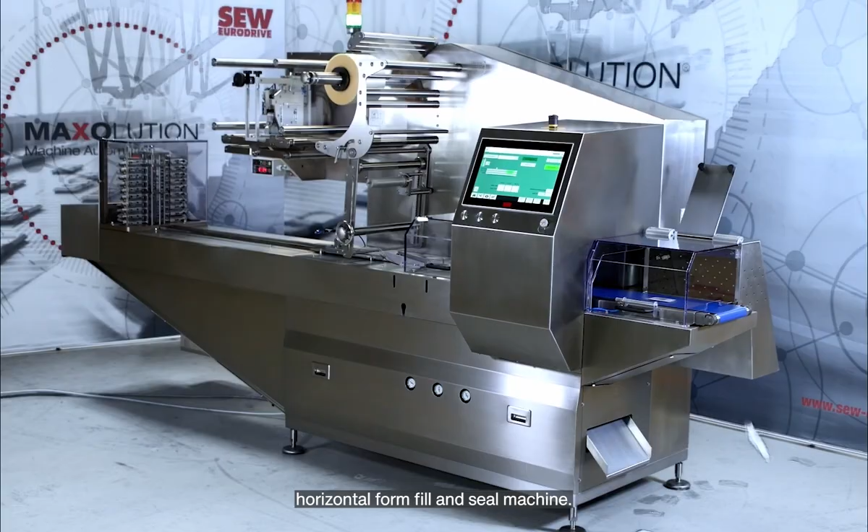This is how it works. In this three-part series, I'll be showing you how we at SEW automate a 5-axis horizontal form fill and seal machine. In this first part, we'll be preparing the machine's axis here in the office. I'll be showing you how you can use our solution package to parameterize the components and how easy it is to jog the first axis in manual mode.

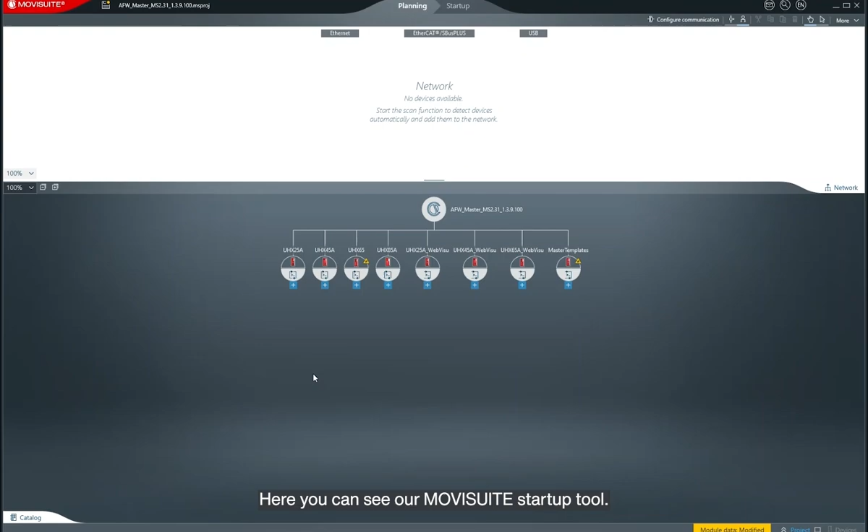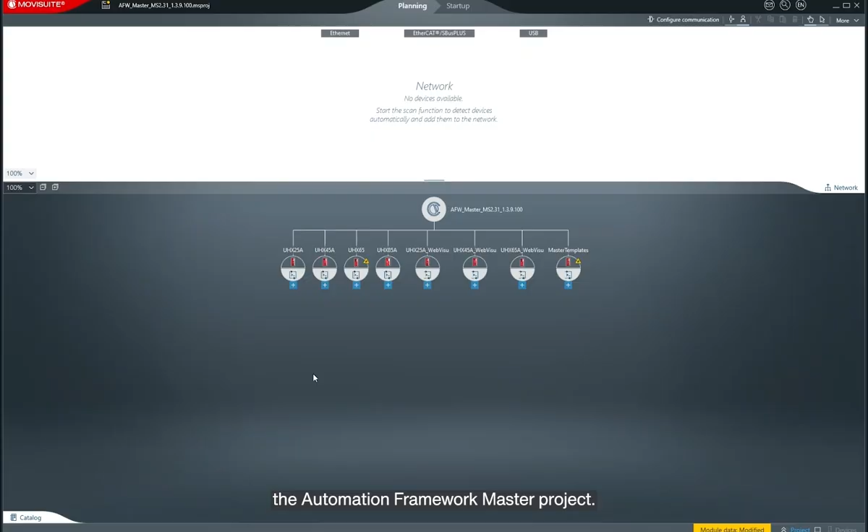Here you can see our MOVISUITE startup tool. We've activated planning mode, making it easy for us to carry out the initial steps in the office. We've already opened the automation framework master project. You can see the starter projects for our controllers and our master templates for the machine modules. We're using a MOVI-C controller UHX65 for the form fill seal machine, so we start by deleting all other controllers.

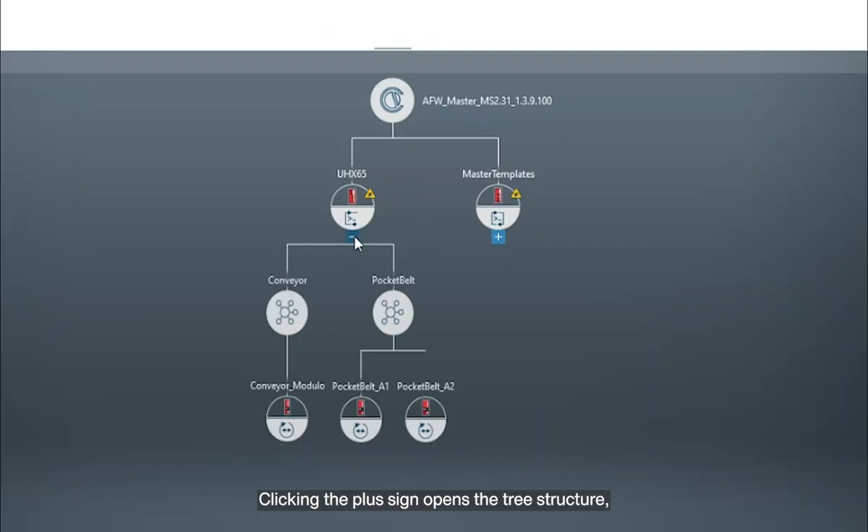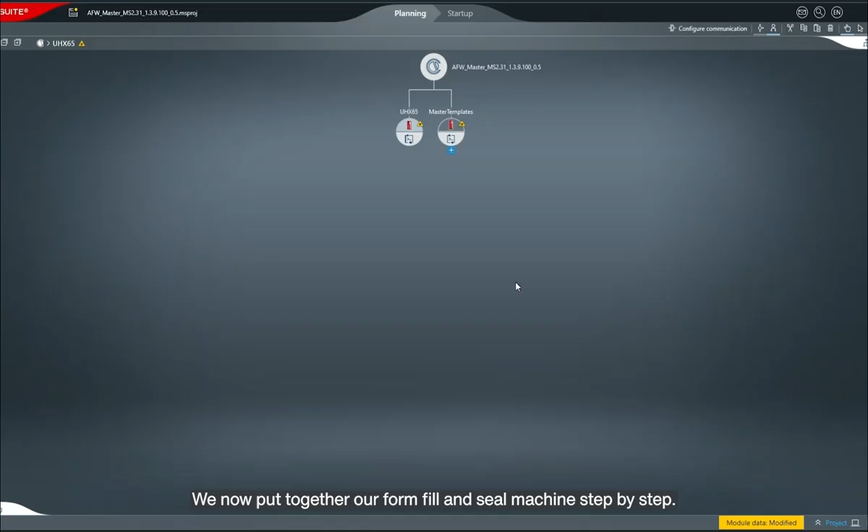Clicking the plus sign opens the tree structure, and we can see that the controller already contains a sample project with a simple conveyor and pocket belt. We don't need these machine modules for our form fill and seal machine, so we delete them before going any further. We now put together our form fill and seal machine step by step. First of all, we take a virtual axis from the machine module template library. This axis is the timing master for all the other synchronized axes.

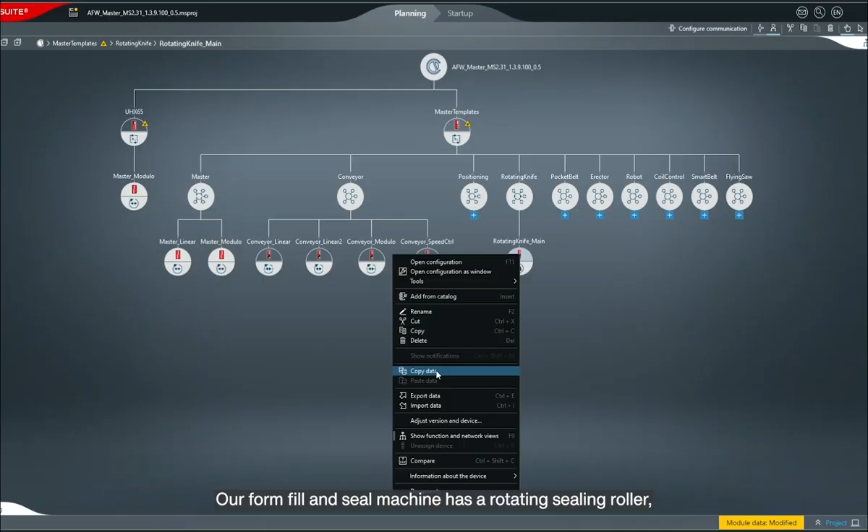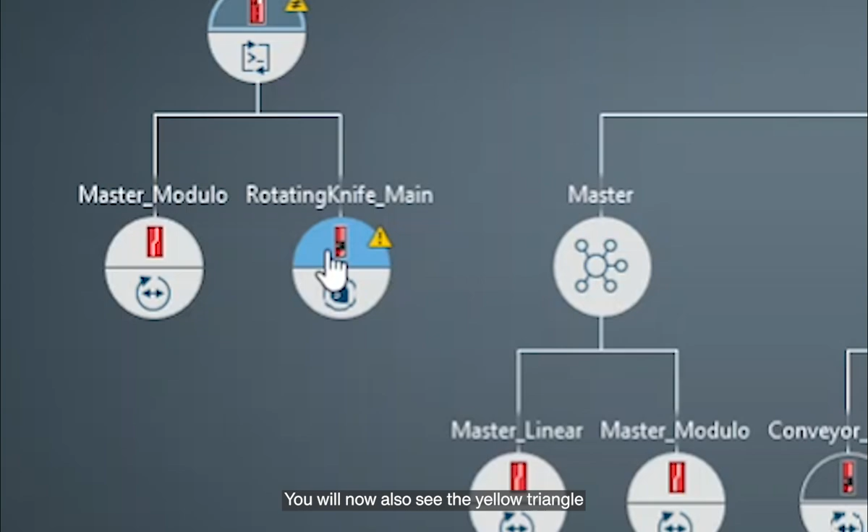Our form fill and seal machine has a rotating sealing roller, and we can simply copy and paste the suitable axis module, including the camming. You can see MOVI-Kit camming in the bottom half. You will now also see the yellow triangle. MOVISUITE is telling us we need to re-parameterize the master axis. We now have to assign the master correctly. To do this, we click our rotating knife controller functions and select camming. On the camming tab, we select master modulo.

We now copy the axis 3 times and assign the appropriate names. Longitudinal seal for longitudinal sealing, cross seal for the sealing roller, output conveyor for the output conveyor, and the pocket chain for the timing chain with the product pockets. This is what you should end up with.

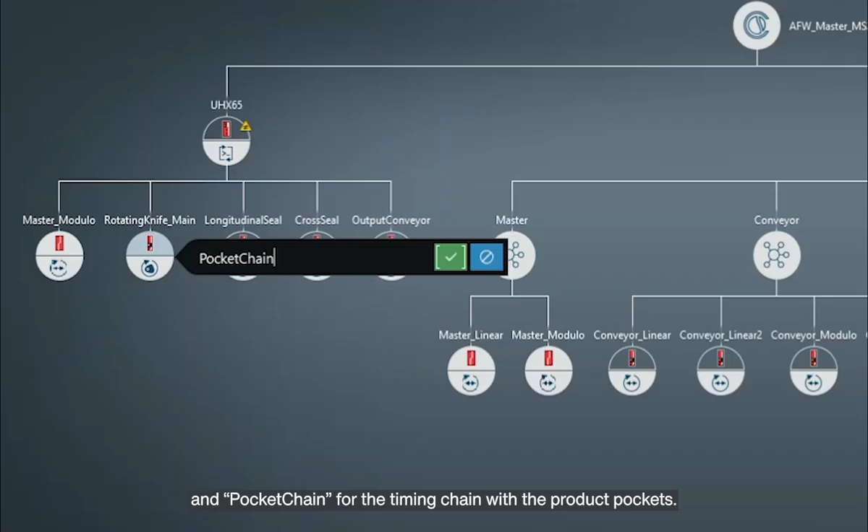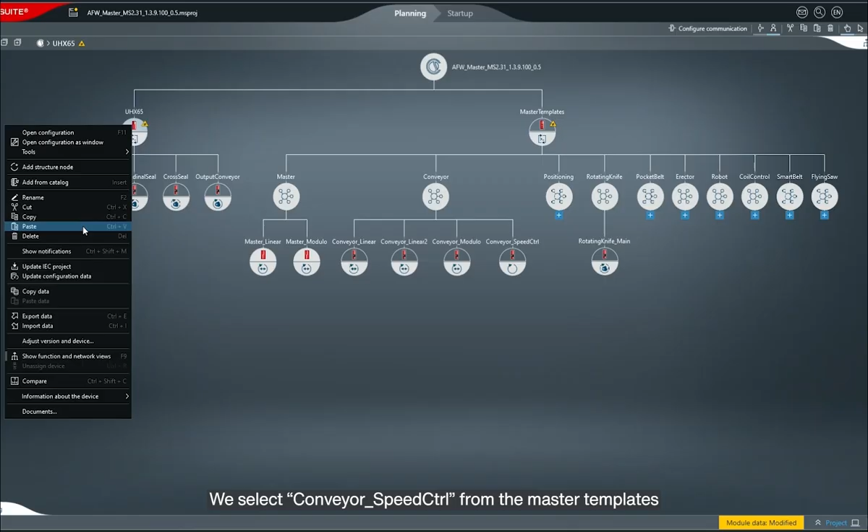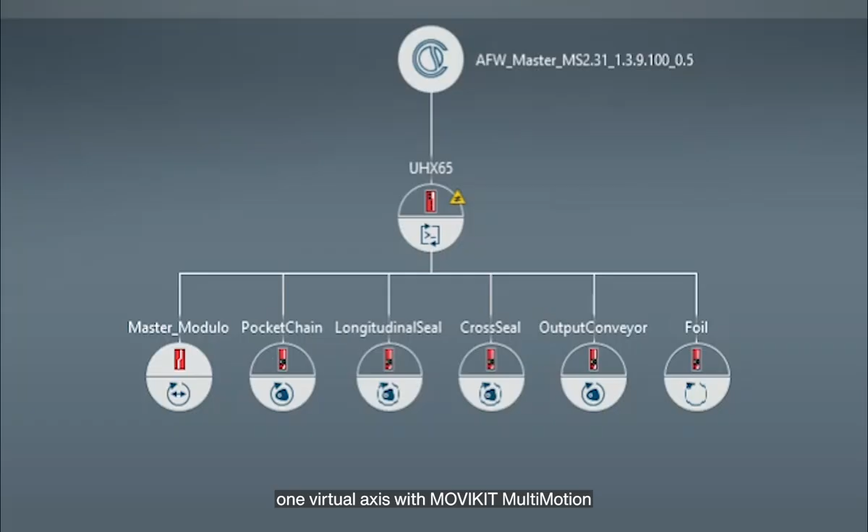All we need now is the foil takeoff axis, a single speed-controlled axis. We select conveyor speed control from the master templates and call the axis foil. Lastly, we delete the master templates and are left with the finished structure. 1 virtual axis with MOVIKIT MultiMotion, 4 axes with MOVIKIT MultiMotion Camming, and 1 axis with MOVIKIT Velocity.

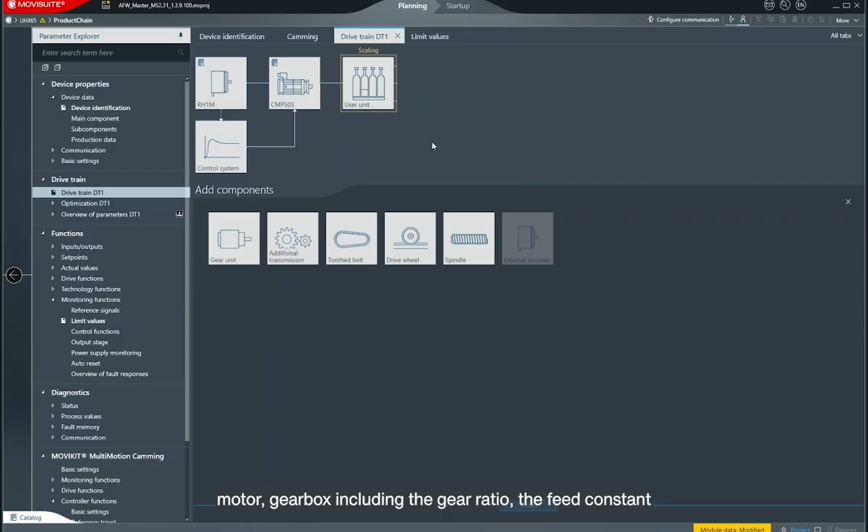The next step is to parameterize these axes. Given that we want to prepare as thoroughly as possible in the office, we'll set the parameters in advance. To do so, we replicate the mechanical drivetrain in MOVISUITE and select the encoder, motor, gearbox including gear ratio, the feed constant, and the user units from the database. We repeat this process for all axes.

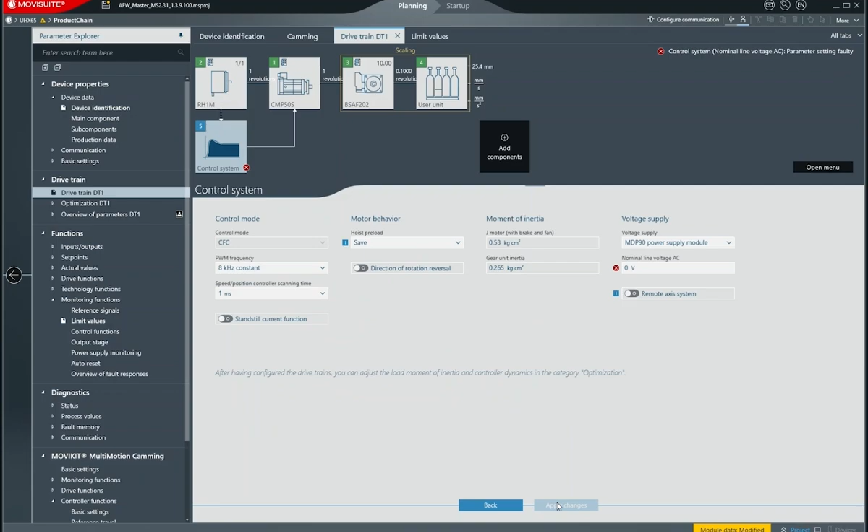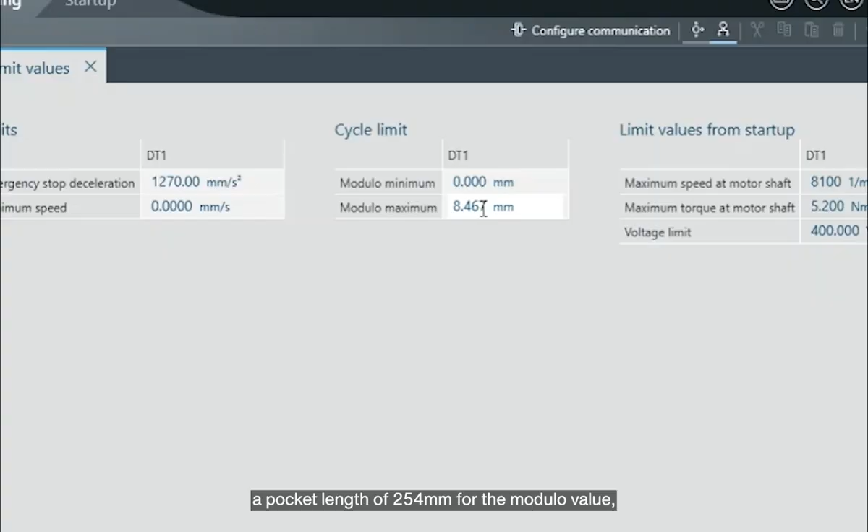When the values are transferred to the inverter, MOVISUITE suggests adjusting further parameters. For the timing chain, we can parameterize a pocket length of 254 mm for the modulo value to ensure later that 1 master cycle corresponds exactly to 1 slave modulo value. We've now reached the point where we can connect the SEW-EURODRIVE components in the switch cabinet for the first time.

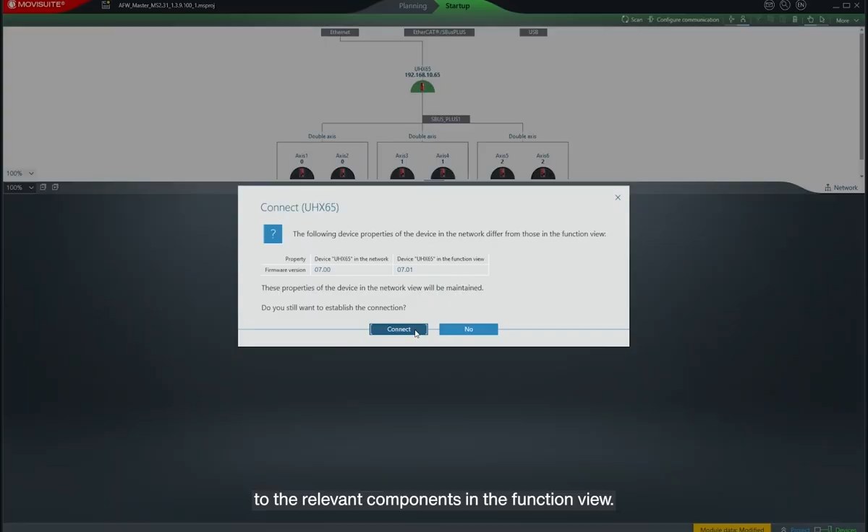Welcome back. Thanks to our detailed preparations in the office, we are ready to start up in just a few minutes. We switch to startup mode and perform the network scan. Step by step, we now simply connect the controller and the scanned axis to the relevant components in the function view. This involves taking over the parameters we prepared on the computer. The right half of the third double axis remains unused, and we drag it into the function view without MOVIKIT.

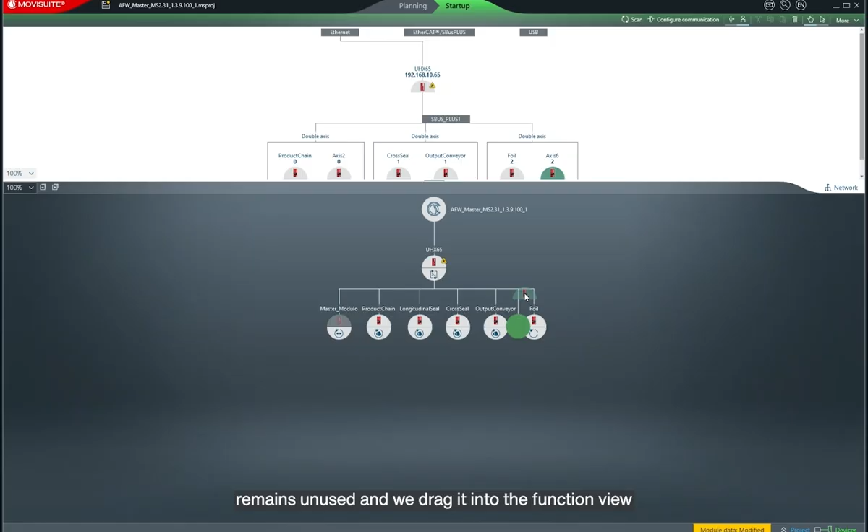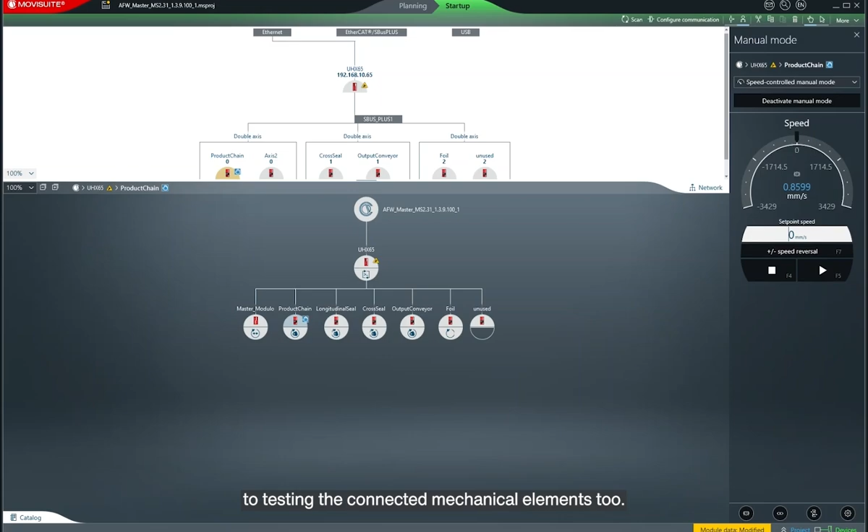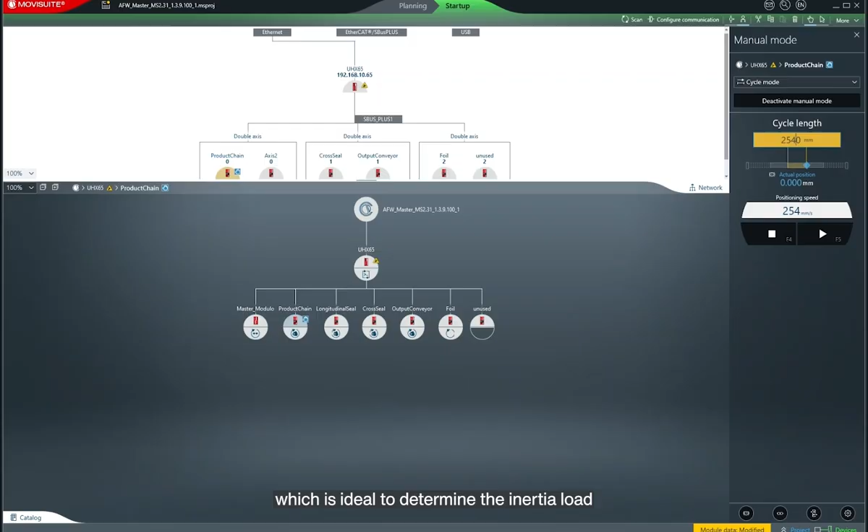We can carry out the first function test straight away in manual mode. If the wiring is okay, we can move straight onto testing the connected mechanical elements too. Besides speed-controlled mode, there is also an option for selecting position-controlled mode and cycle mode, which is ideal to determine the inertia load and to optimize the closed-loop system's parameters.

That was really fun, and we were able to prepare a lot of things in the office in advance at the planning stage using MOVISUITE. Thanks to the excellent work of our colleagues, the axis worked instantly, enabling us to focus all our efforts on the programming. In the second video, I'll be showing you just how quickly we can use the program to jog the axis thanks to the automation framework from SEW-EURODRIVE.